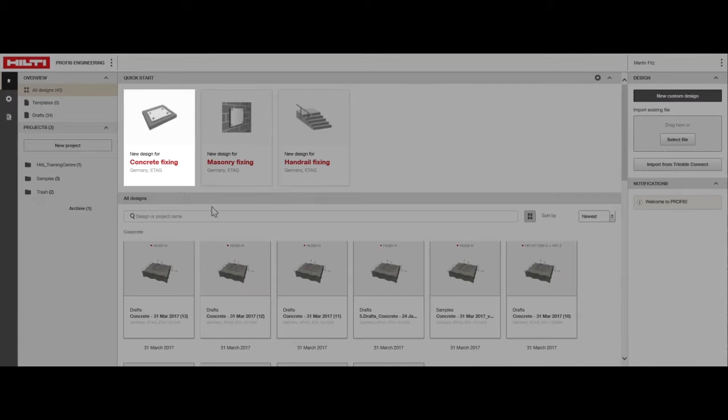First, navigate to the Concrete Design module from the Setup screen. To get started, select whether your base material is cracked or uncracked concrete. The default selection is cracked.

Uncheck this only if the concrete will remain uncracked throughout its life cycle and supporting calculations can be provided showing concrete will always remain under compression. For this example, we've selected cracked concrete. Now we must choose the concrete grade from the drop-down box.

C20/25 to C50/60 are covered by standard anchor approvals. Low-strength concrete is allowed for selected anchors and is designed according to the Hilti sofa method. For this design, we'll select C25/30. Let's move on to reinforcement.

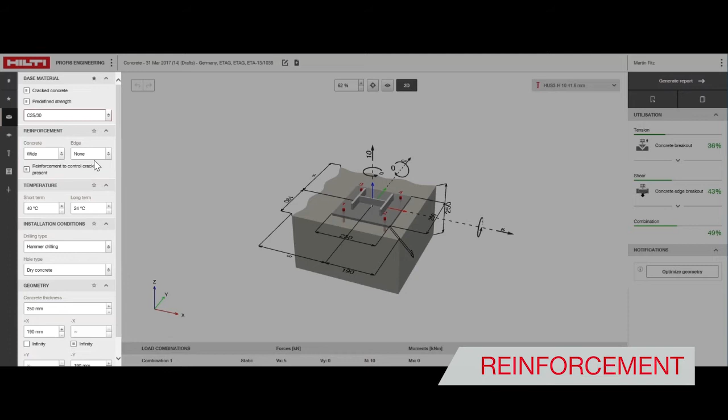Choose None when reinforcement is completely absent. Choose Wide when rebar spacing is greater or equal to 150 mm regardless of bar diameter. You should also choose Wide if rebar spacing is more than 100 mm with a rebar diameter smaller than 10 mm.

Dense should be selected for all other cases, including if the degree of reinforcement is unknown. Highly reinforced concrete members actually have a negative impact on anchors with shallow embedment depths. For this example, we'll select Wide.

Edge reinforcement works in the opposite way, in that the resistance increases with an increasing degree of reinforcement. Choose None when reinforcement is completely absent. This is the most conservative option.

Closely spaced stirrups act as hanger bars. The effect of each of these settings differs from guideline to guideline. For this design, we'll select None.

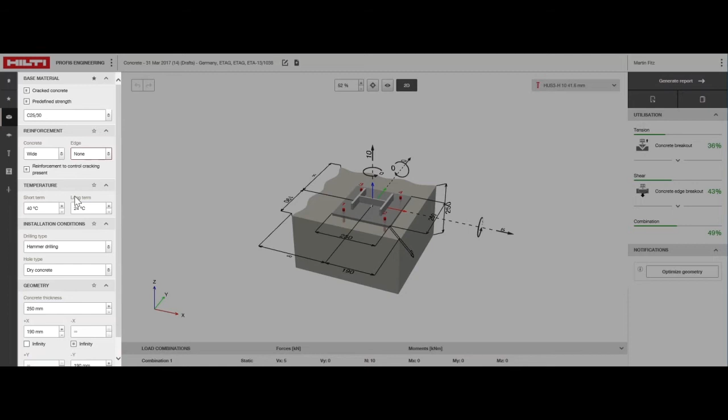Concrete temperature affects the design performance of chemical anchors. Enter the maximum mean value over a typical day-night cycle in a number of weeks or months.

The drilling method and the condition of the hole while installing the anchor are defined under installation conditions. This influences the anchors available for selection as well as their load capacity.

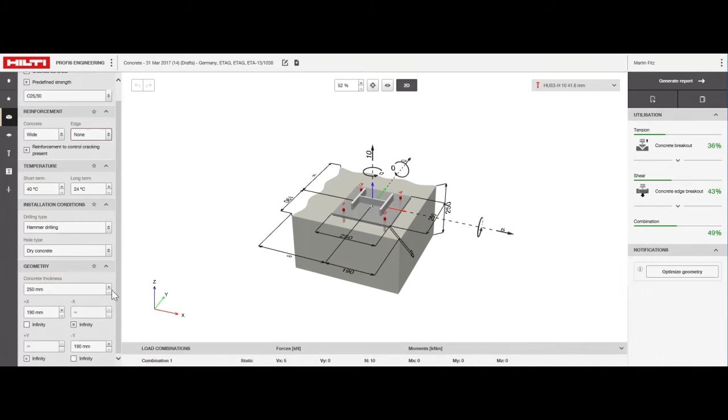To position the profile on the concrete, values can be entered in the 3D model or in the Menu tab. First, we must set the thickness of the concrete member. This limits the depth to which the anchor can be set. We'll set the concrete thickness to 200 mm.

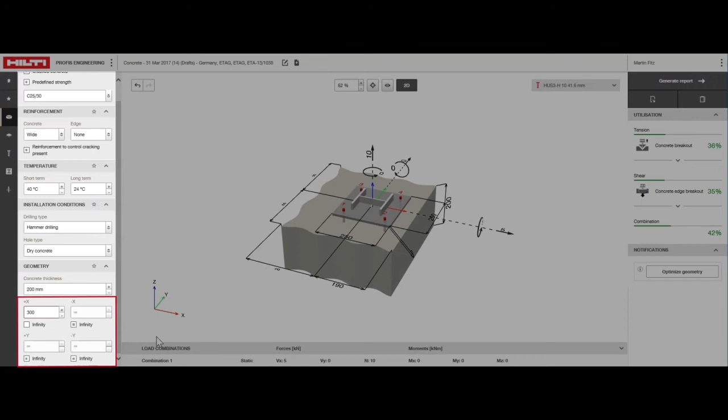Next, set the position of the steel profile with respect to the concrete edges. This affects the amount of concrete activated for tension or shear loading. Here's where you can set the edge distance. We've set the distance between the center of the profile to the concrete edge at 300 mm.

Now it's time to choose the type of load: static, seismic, fatigue, or fire. For this design case, we'll apply a static load with a compression load of 10 kilonewtons, a shear force towards the edge of 15 kilonewtons, and a bending moment about the y-axis of 10 kilonewton meters.

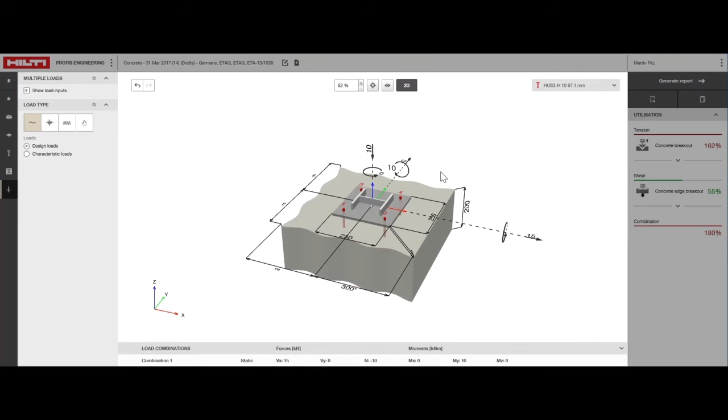A valid solution should have the anchor utilization ratio less than or equal to 100%. If we look to the right, we see a utilization of 180%, which means adjustments are needed. There are ways we can fix this.

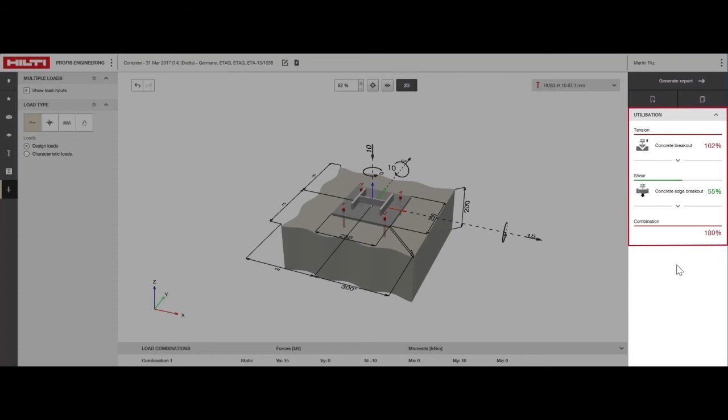We could change the anchor, keeping the base plate dimensions and anchor spacings fixed, or we could keep the anchor fixed and adjust the base plate dimensions, anchor spacings, and number of anchors. Let's try the first approach.

In the anchor selection window, we can go through each family type and size until we get a utilization of less than or equal to 100%.

Or to speed things up, we can calculate all anchors that can be used with the same design inputs. In the filter settings to the left, we can show only those anchors which work. The first thing you may notice is that the utilization is 100% for all anchors.

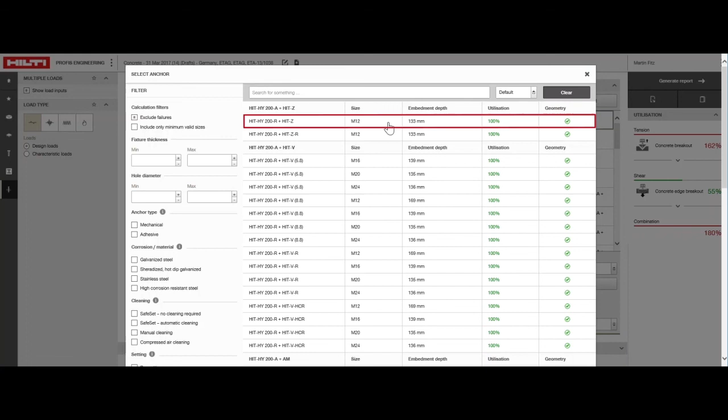That's happening because the optimized embedment depth option was pre-selected. Here we see that HIT HY200 adhesive with a HIT Z M12 rod at an embedment depth of 135 mm provides a solution. By clicking on the anchor, we select it for this design and return to the main window.

At the bottom of the anchor selection window, we now adjust the embedment depth to 140 mm by switching to User Selected Embedment Depth and entering 140 mm manually.

Now you have the information you need to jump in and start designing anchor fixings in concrete quickly and accurately.